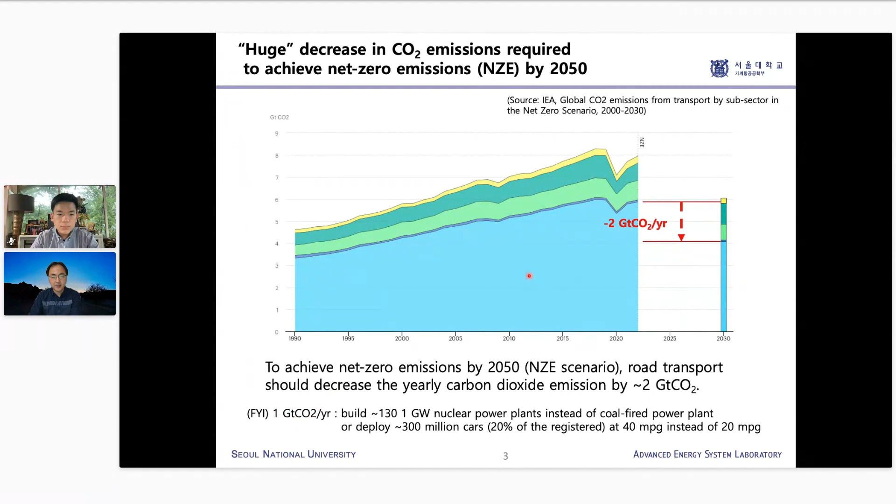In the road transport sector, people are developing new technologies and are interested in new technologies to reduce GHG emissions. These are the types of powertrains and fuels available nowadays.

The very first one is the conventional vehicle, using gasoline or diesel as fuel and the internal combustion engine as the power conversion device. That's the conventional vehicle, or ICEV, internal combustion engine vehicle.

There's also the hybrid electric vehicle. It still uses gasoline and diesel as fuel and still has an engine, but part of it is actually driven by a battery and motor system, which is why it's called a hybrid electric vehicle. But it's still depending on gasoline and diesel as fuel.

Next is the battery electric vehicle, which is a big topic nowadays, using electricity as fuel, and the powertrain is only battery and motor. Lastly is the fuel cell electric vehicle, where hydrogen is used as fuel with a fuel cell as the energy conversion device, converting hydrogen into electricity, and that electricity drives a motor to drive the car. This is also a new technology people are using to reduce GHG emissions.

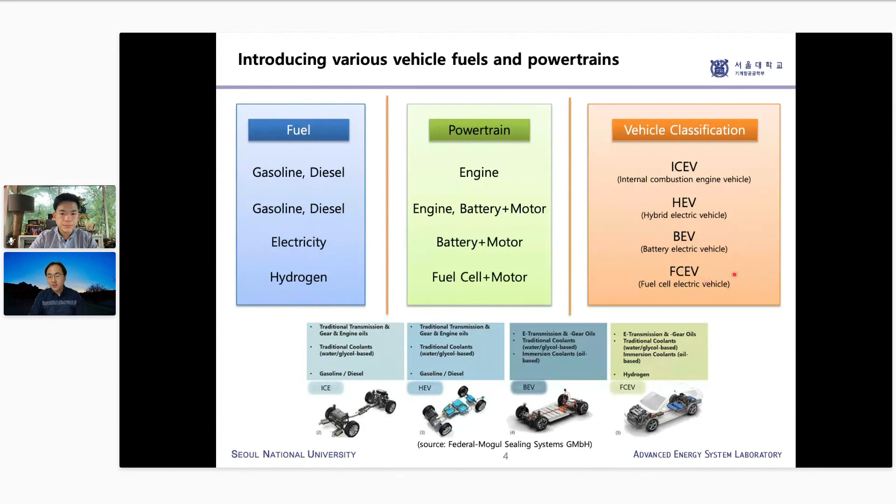People are devising many different ways of reducing GHG emissions. Let me ask this question: by introducing the electric vehicle or hydrogen electric vehicle, people's intention is to reduce carbon emissions out of the vehicles. The first question might be easy to answer: between the gasoline-fueled internal combustion engine vehicle versus the battery electric vehicle, which is cleaner in carbon emission sense?

Well, there's no CO2 or carbon emissions out of the tailpipe of the electric vehicle, so you may say it's cleaner. Now, if comparing battery electric vehicle versus hydrogen fuel cell vehicle, once hydrogen enters the fuel cell and reacts with oxygen from the air, it only produces water, meaning no carbon emissions in the tailpipe. So comparing battery electric vehicle and hydrogen fuel cell electric vehicle, which is better, or are they the same? These questions can be answered from different perspectives, with a wider scope to consider.

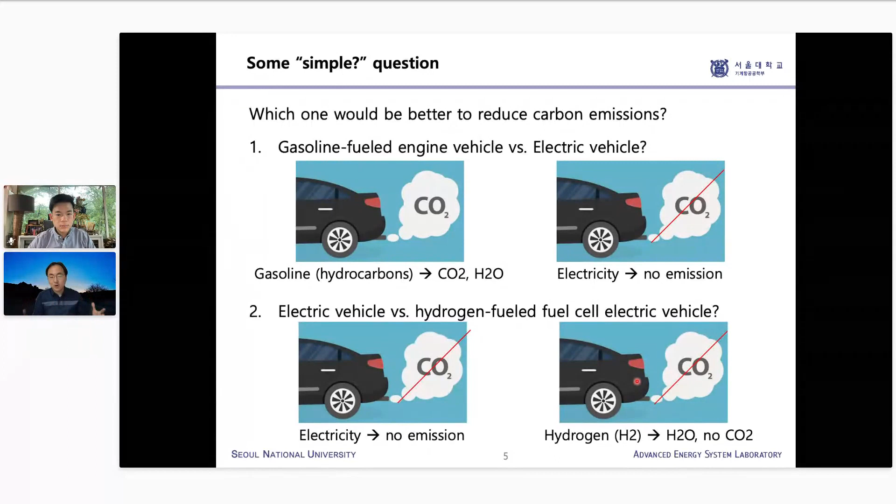That's what's happening in this slide. First, what we've focused on is tailpipe emissions. Again, the internal combustion engine vehicle has carbon emissions from the tailpipe, and the battery electric vehicle has none. That's fine, so we just compare it here.

But the thing is, gasoline isn't just from the air, right? We need to make it—it's made from crude oil and turned into gasoline. The same is true for the electricity used in the electric vehicle. Electricity also has to be made, with power generation associated with it, and the power generator or power plant needs fuel too. So electricity doesn't come from nowhere, it has to be made.

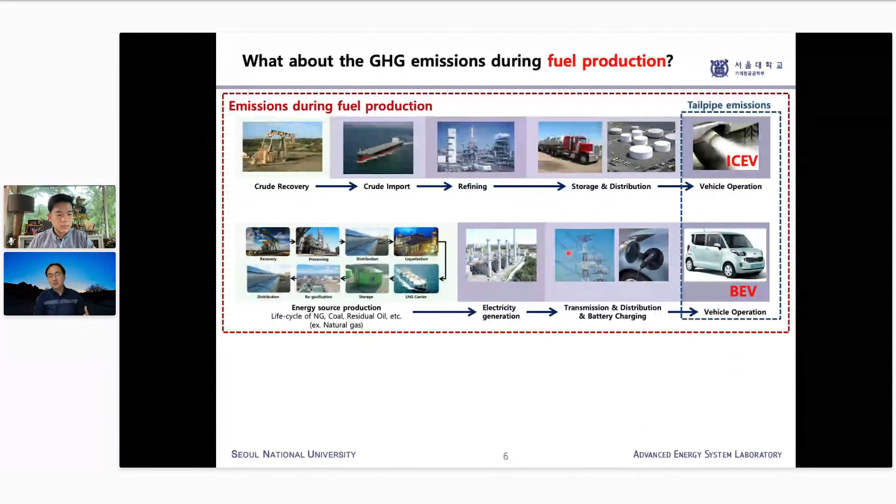So now we can think about which one is better if we include in our study scope all these fuel production processes, and the greenhouse gas emissions associated with them. Now we can ask that. This isn't actually the end of the story—we can increase the scope further.

Because with the internal combustion engine vehicle versus battery electric vehicle, we know the battery electric vehicle has a big battery pack on top of the frame of the car, meaning it's a different car. Having a different powertrain might cause differences in vehicle production—raw materials, parts production, vehicle production—and different vehicles can have different things happening in their life cycle processes, which might change the emissions associated with that.

So this wider scope, or life cycle thinking, is actually what the LCA study is based on.

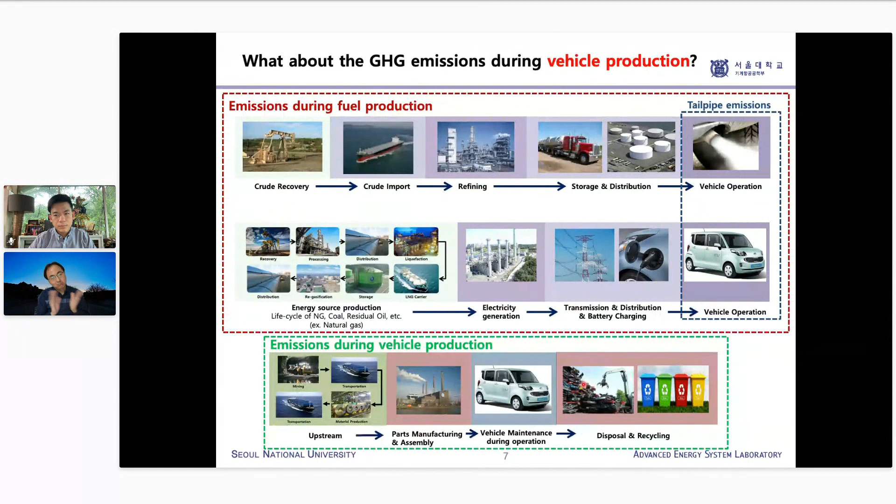LCA answers for such holistic effects from a larger scope of thinking. LCA is nowadays adopted very widely, and is increasingly adopted in many government regulations and rules. So it's getting more and more important, and it's been steeply increasing in importance over the last couple of years.

LCA, from that holistic perspective, is the assessment of environmental impacts. So LCA is about the environmental impact—it's not about the economical, it's about the environmental impacts.

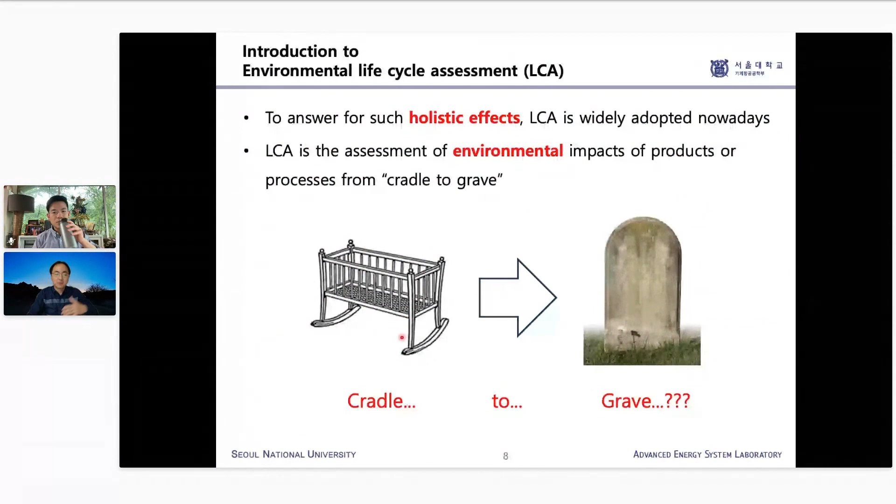Sometimes we call that the cradle to grave scope, or cradle to grave study. The cradle is where we put a baby, lying in it—that's associated with the birth of something. And the grave, that makes sense too—this is the end of something. So cradle to grave basically means from the birth, or the start, to the end. That's what the life cycle is.

To use more technical terms, cradle to grave associates with these main categories. First, raw material extraction is where it starts—you need to get some materials out of the ground, for example, and out of the raw material you're going to make the more useful material.

You also need to manufacture the parts and manufacture the vehicles. In the middle, you need to transport the raw materials and the better material, and also move around the parts and the vehicle.

Once you make the vehicle, you need to transport it to the customer or the dealer shop, for example. There will be some other transportation and distribution associated, and also the use phase—because the product will be used, and during use there are also some consumable things, and all those things are included in the life cycle phase.

Finally, at the end of the material or product's life, there will be disposal, and also some part of it could be recycled. So these are the cradle to grave processes we typically refer to.

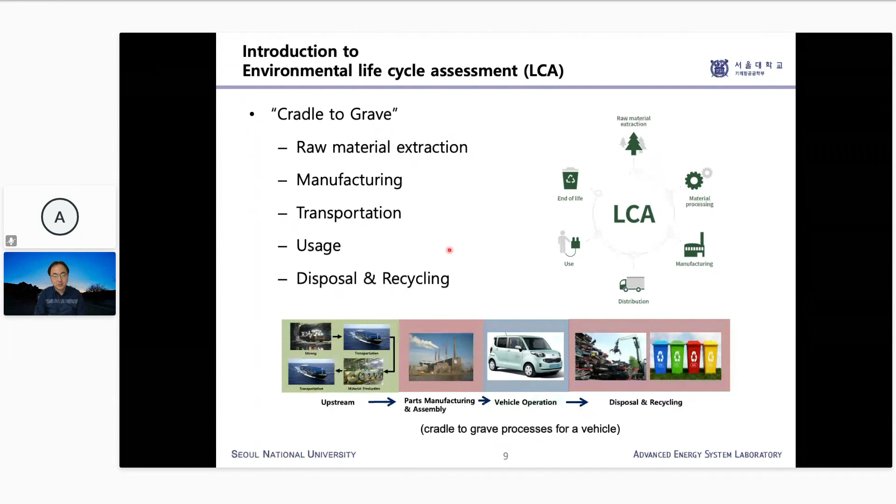Once you have that life cycle ready, associating the parts, materials, processes and services, what you do next is calculate the environmental impacts during those life cycle processes we just described. Throughout all these life cycle processes, you come up with the environmental impacts.

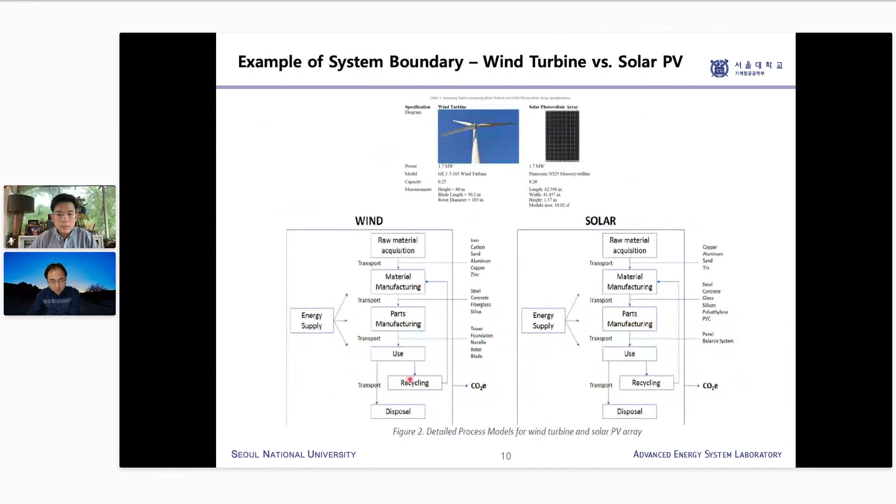Those environmental impacts come from, for example, greenhouse gases or particulate emissions, and during these processes water can be used, so there are water uses. Also, if there are toxic chemicals from any of these processes, there could be toxic materials involved. And if there's any land use change during these processes—like cutting down trees to make way for plants—that creates land use change, and so on and so forth.

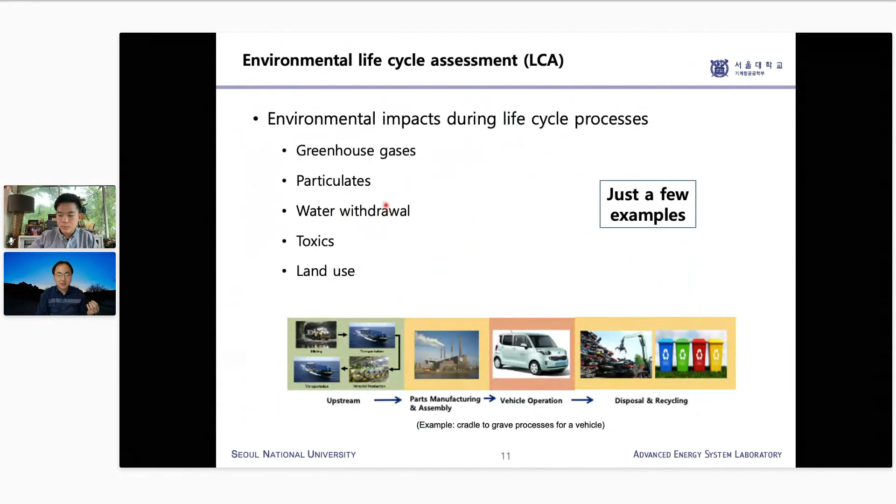So these are just kind of small examples, and then to give you more of the bigger picture, this is actually what that is. So from those life cycle processes, you can talk about all these different materials and emissions and pollutants, or the small elementary flows, and all these things are coming out of the processes, and we call that an inventory.

And then out of those individual elementary flows, you're going to combine them together to come up with the impact category. For example, currently people are mostly considering climate change or the greenhouse gas effect. So out of these many different elementary flows, you're getting the greenhouse gas species only, then using the global warming potential value to get the CO2 equivalent mass in the end, and that gives us the overall climate change effect.

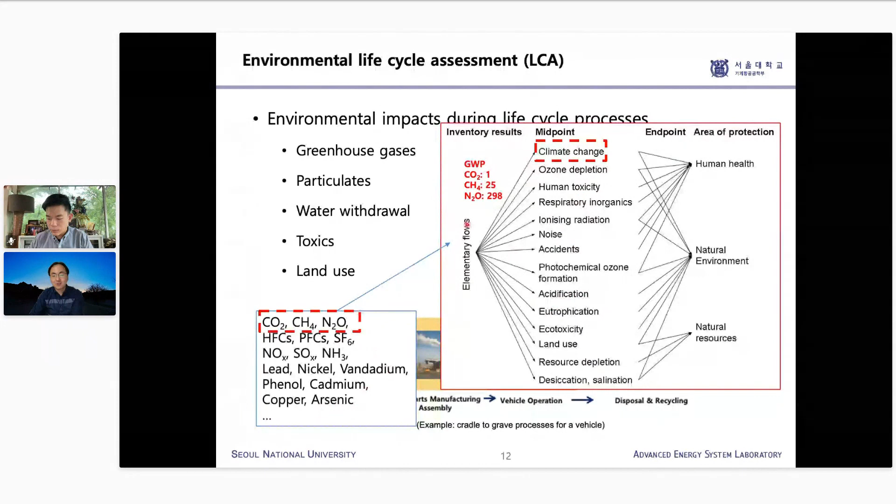I know nowadays climate change is the main focus of LCA studies, but that's not actually the end of the study, because LCA considers all the different impact categories we can think of: ozone depletion, human toxicity, even noise, and acidification. So many different impact categories out of different elementary flows. But nowadays people are mostly interested in the climate change impact category.

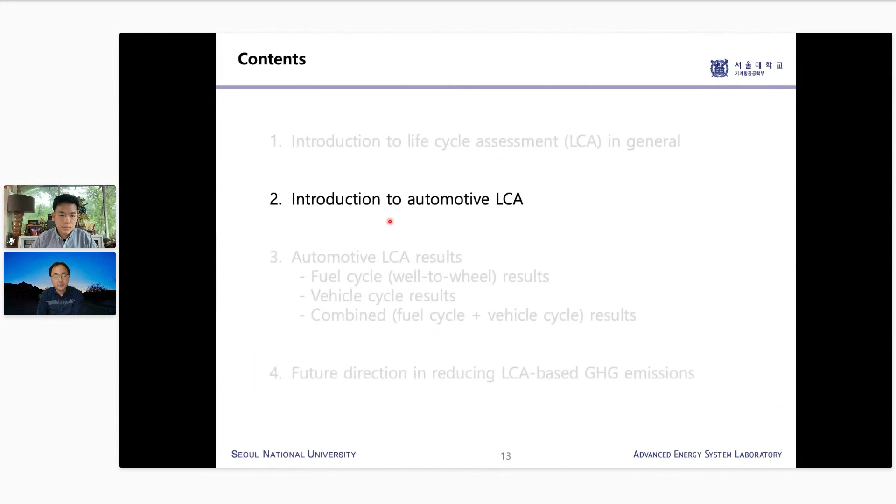So that's the general introduction to LCA, what it is, what it covers, and how it's done. Let's move on to the second topic, which is more specific: LCA on the automobile, which we call automotive LCA. At this point you might think, okay, we are talking about the life cycle, and that's too much of a scope. What is the life cycle, and what's associated? Where is the boundary? Do we really consider everything around it?

So that's the thing. In the ISO standard of LCA, the first thing users should do is set the objective of their LCA study, and then set the system boundary or scope of the LCA study to achieve that objective. So when you perform LCA, we need to set a certain scope or system boundary to start with. So this is what it is.

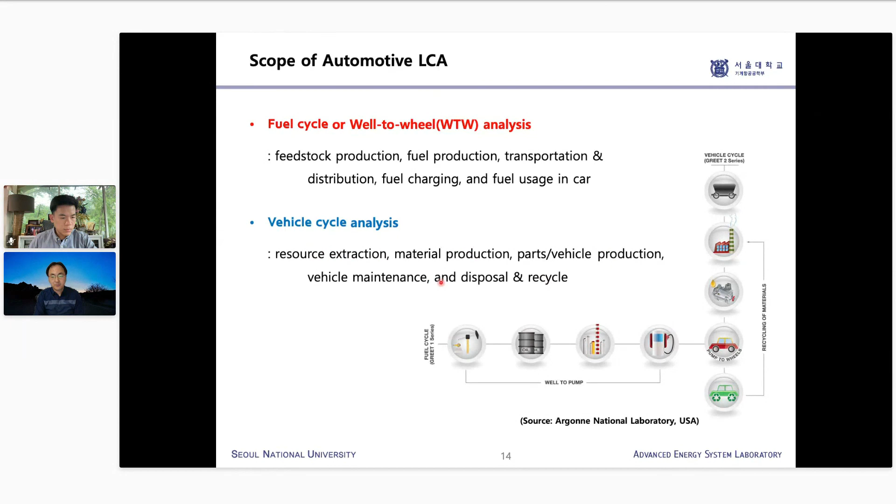So, what have we done so far in our research group? We adopted the GREET program, an Excel-based program, as the framework of our LCA calculation. GREET is originally from the US Argonne National Laboratory, and we are using that framework, but we need to change all the major data inside it, because the Korean situation is different from the US situation. So into that framework we put Korean-specific data. That took time, and it's still taking time now.

And then since 2011, we started this work, and we are referencing the domestic data and foreign data, and also we are partnering with all these associations and the vehicle OEMs to get better data. So typically, as a joke, when we talk about LCA, we call it this way: garbage in, garbage out. Meaning that if you put bad data into it, the result out of it is not any good. So the data is actually the key to this LCA analysis, and there are lots of data needed, as you can imagine, because we are talking about the life cycle.

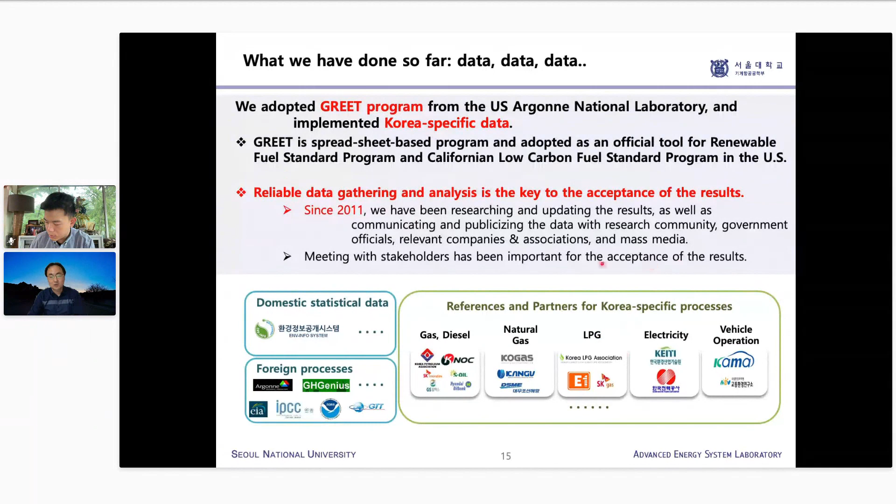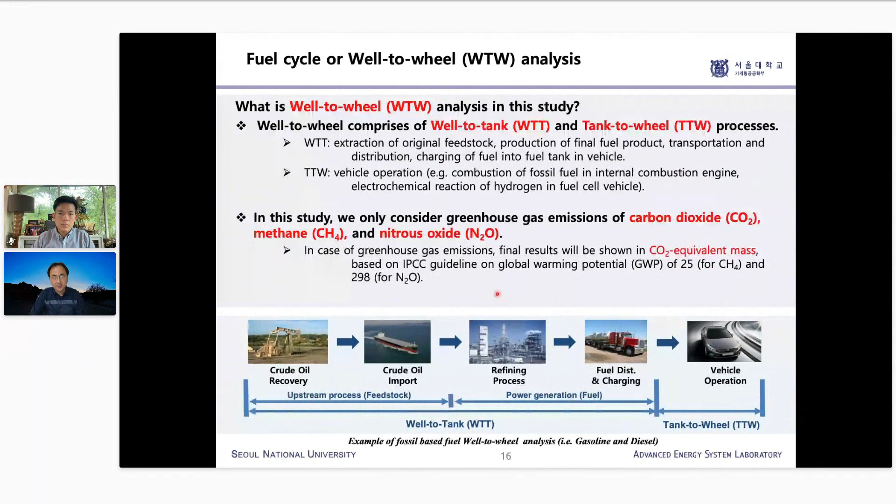And then talking about the vehicle cycle, now you have a sense of what the vehicle cycle is. It's about vehicle production. But one thing I need to point out: this is not just making the vehicle, it's also use of the vehicle. During the use of the vehicle, certain maintenance materials are used for your vehicle operation. For example, you need to change the tires and the engine oil during the lifetime. Those tires are made from something, so there's a life cycle associated with your tires and with your engine oils, and those are also included. And then there's recycling once the car is at the end of its useful life. And the same greenhouse gas species are considered.

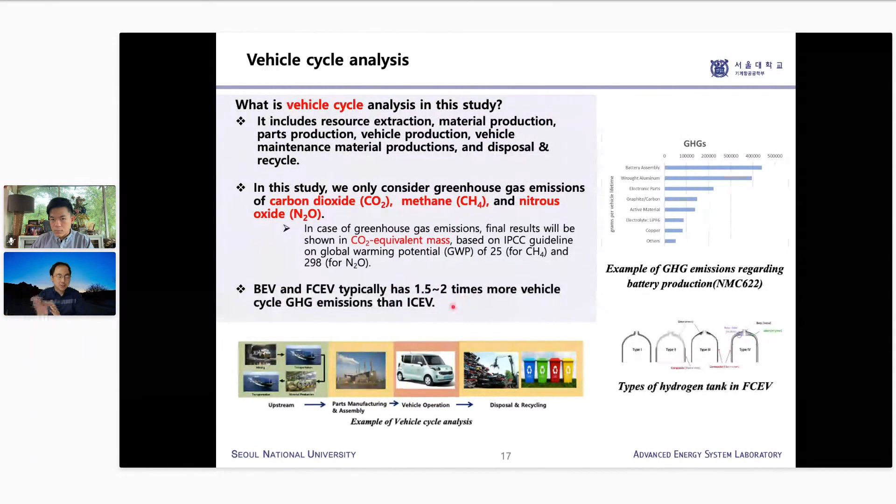To give you some sense, and we're going to see the quantitative numbers later on, our original motivation for the vehicle cycle is: how different are the battery electric vehicle and fuel cell electric vehicle compared to the internal combustion engine vehicle in vehicle cycle emissions? Let me tell you, as a rule of thumb, the battery electric vehicle and fuel cell electric vehicle in the same vehicle class emit 1.5 times or 2 times the greenhouse gas emissions during the vehicle cycle only. But we're going to see the quantitative numbers in the following slide.

Okay, so this is about the vehicle cycle analysis, and then the scope of fuels and powertrains we've covered in this study. From the fuels perspective, we consider gasoline, diesel, LPG, and also natural gas. But in today's presentation, we're going to only focus on gasoline and diesel. And also for the electric vehicle, we have electricity as a fuel, and hydrogen as a fuel for the fuel cell electric vehicle.

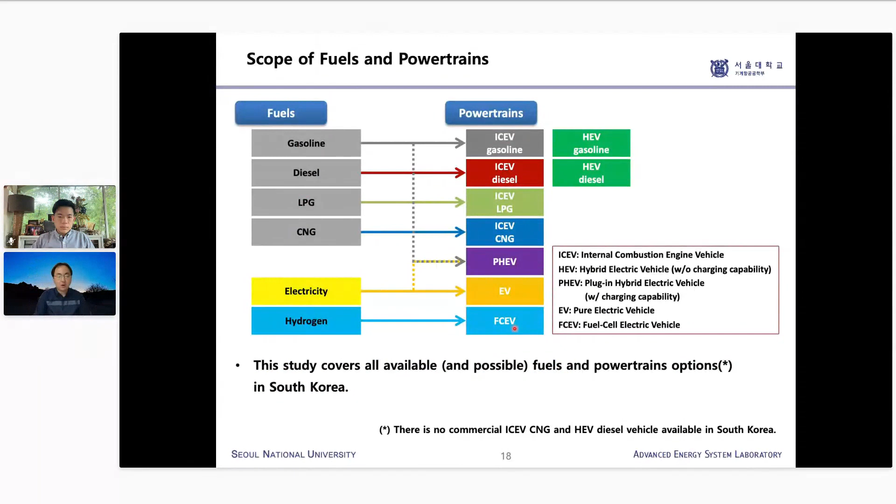From the powertrain perspective, we consider the internal combustion engine vehicle, ICEV, the hybrid electric vehicle, HEV, and also EV and FCEV. Those will be covered in the results section. We've actually done the whole thing in our study, but we will focus on some part of it.

Okay, so finally, let me move on to the results section. This results section consists of three subsections. Firstly, we're going to start with the fuel cycle results, meaning we focus on the fuel cycle or well-to-wheel processes only. Then we switch gear into the vehicle cycle results, so only the vehicle production. And finally, we combine these two results together to come up with the holistic or whole scope result. So we're going to go one by one.

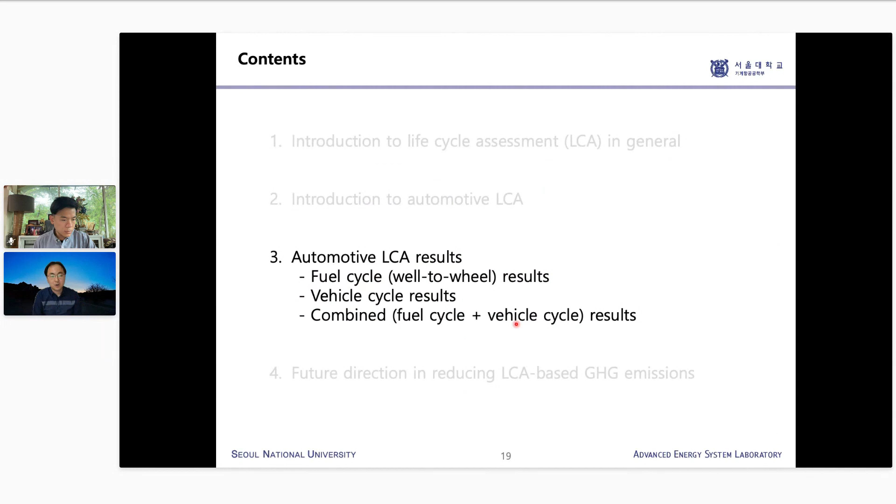So let's start with the well-to-wheel or fuel cycle result. This slide introduces how to read the results; it's just an example, and the real results follow. The well-to-wheel GHG emissions will be shown in grams CO2 equivalent per kilometer. What that unit means is, if you drive the car 1 kilometer, this many grams CO2 equivalent of emissions happen during the whole fuel cycle or well-to-wheel processes.

If you see the left figure, an example of the gasoline-fueled internal combustion engine vehicle, the plot shows about 210 or 220 grams CO2 equivalent per kilometer. So if you drive 1 kilometer, that's how much fuel cycle emissions there are. In this plot, the gray section is the vehicle operation, the big chunk of the fuel cycle. That's the tank-to-wheel emissions, so the tailpipe emissions.

So we've done all this work to come up with the fuel cycle emissions for this internal combustion engine vehicle, crude oil extraction, refining, and all those things. But in the end, the fuel cycle emissions are dominated by the tank-to-wheel process, or tailpipe emissions. That's the typical characteristic of the internal combustion engine vehicle. We still have emissions from the well-to-tank processes, making the fuel, which include crude oil extraction, refining, and everything.

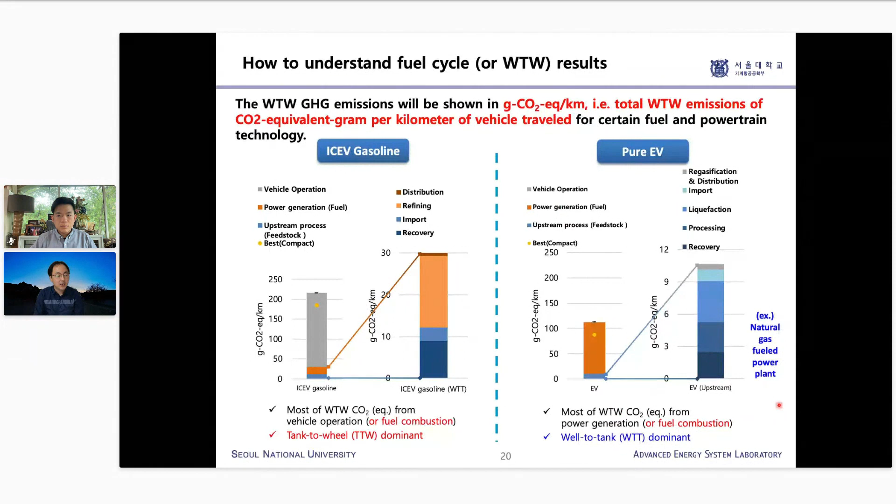So, for the EV case, there's definitely no tank-to-wheel emissions. This is just well-to-tank emission dominant, or well-to-tank emissions only. Okay, this is how you see the result, and then let's see the real result.

This well-to-wheel GHG result is from all passenger vehicle sales in 2019 in Korea. So we just have this passenger vehicle sales data, and then we do the weighted average by sales volume of all those models considered.

Then we categorize it into the internal combustion engine vehicle fueled by gasoline, diesel, and also the hybrid electric vehicle fueled by gasoline. There's no diesel hybrid electric vehicle in Korea. And then the battery electric vehicle and fuel cell electric vehicle. Why there are three of them, I'm going to come back to that later.

So let's just compare the average value. You see that gasoline internal combustion engine, diesel internal combustion engine, and hybrid can decrease the fuel cycle emissions hugely. And it still has higher emissions than the battery electric vehicle.

So you should see this kind of plot down here. This yellow dot is actually the compact vehicle, and it's saying 'best.' What that means is we are talking about the fuel cycle emissions associated with the compact size vehicle with the best fuel economy - so the best efficient compact size vehicle.

So if you just pick that out, this yellow tells you that. Meaning this yellow tells you what you can do best, having the fuel and powertrain combination in that analysis. That's what it is.

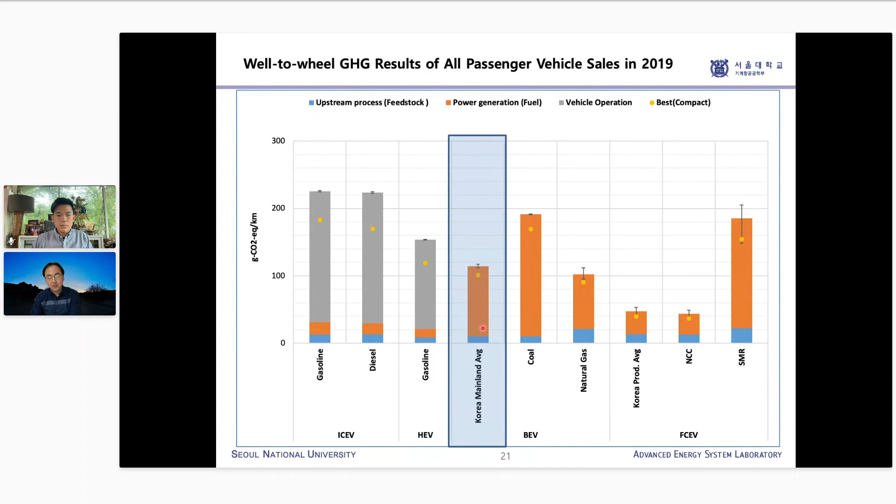This is the Korea mainland average result. What it is, we are considering the power generation mix to come up with the number. Using statistics in Korea, we know every power plant in Korea, every power generation amount throughout a certain year, and also every fuel used in that specific power plant throughout the year. So we can come up with the efficiency and emissions out of that plant.

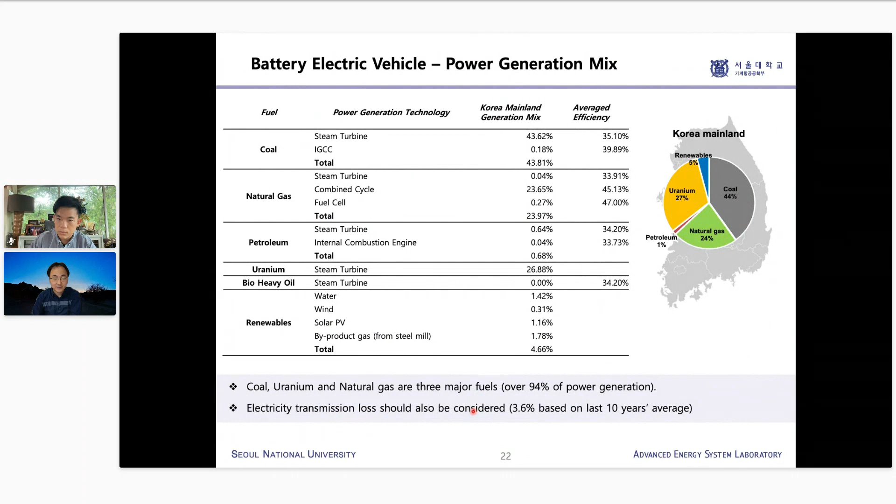That's how we come up with this generation mix, which mainly consists of coal-fired power plant, natural gas-fired power plant, and nuclear power plant. We use that mix of power generation to come up with the number for the electric vehicle. We also consider electricity transmission loss, because from the power plant to the charging station there will be transmission loss, which should be considered in the life cycle of that electric vehicle.

And then the other two on the right side - this is still the battery electric vehicle, but we're showing you some numbers. This is coal. It's saying coal - what that means is, if you are using electricity from only the coal-fired power plant, what will be the fuel cycle emissions? That's huge, as you can see.

And if you see the best compact number, that's just compatible to diesel or gasoline, right? So that means coal-fired power plant having larger emissions doesn't help the battery electric vehicle. If you're talking about the natural gas-fired power plant, that's very compatible to the mix, and also very good numbers there. The natural gas-fired power plant has higher efficiency, and natural gas itself has lower carbon content in it.

Okay, so that's just more than enough about the battery electric vehicle. Let me move on to the fuel cell electric vehicle. If you see the first one, this again is some kind of Korea average. That was done in a similar way - I'm going to show that in the next slide. Anyway, this is a very small number as compared to the others, right?

Let's see how we come up with the number first, and then we're gonna come back to this slide to talk about the other two.

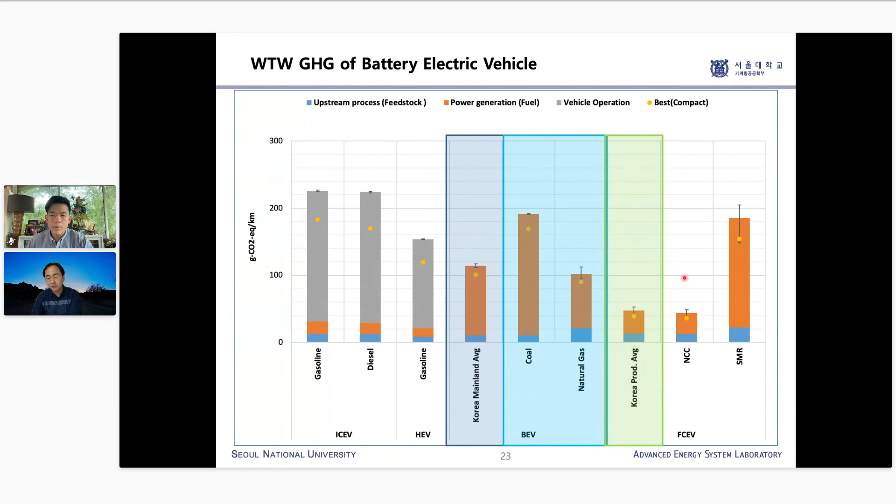You know that hydrogen is not really from just digging the ground, right? Hydrogen is actually a secondary fuel, meaning you need to make it from other fuels, primary fuels. It should be produced, and there are many different ways to produce hydrogen.

So what we've done in our study is look at the hydrogen gas stations throughout the country, and we know how much daily filling capacity they're running on per station, and we also know where they're getting the hydrogen from. So certain hydrogen gas stations use hydrogen from naphtha cracking or the petrochemical industry as a byproduct, some use SMR-based hydrogen, and some use electrolytic hydrogen. We have these different stations using different hydrogen sources in different amounts, so we can finally come up with some kind of share.

It comes out that 95% of the hydrogen used as hydrogen fuel cell vehicle fuel comes from the petrochemical industry or naphtha cracking as a byproduct, and some part of it is SMR or electrolytic hydrogen. Using that, we do the life cycle analysis of that hydrogen production process, and that will be part of the calculation.

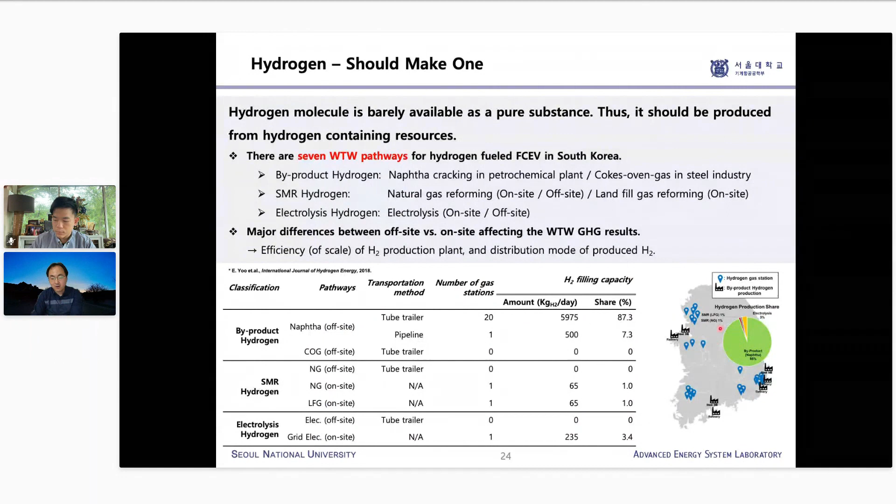The other important thing about hydrogen is distribution and storage in its life cycle. As you all know, hydrogen is one of the lightest kinds of molecules, and in the ambient state, the volumetric energy density is very, very low. So what that means is, to move it around and distribute it—you make the hydrogen in a certain plant and then need to move it to the charging station, you need to distribute it.

To do that, they typically compress the hydrogen, using 200 bar compressed hydrogen in the tube trailer. A tube trailer is like the tanker of hydrogen—basically the hydrogen tanker. That pressure is really high.

But even with that, in Korea, there's a huge hydrogen tube trailer, but it only carries about 300 kilograms per truckload. To compare with gasoline, the biggest gasoline tanker can deliver 25 tons per truck. So you see a difference of orders of magnitude per truckload. Even when you consider that hydrogen has a higher heating value, to deliver the same amount of energy you need 30 times as many truck trips because of the lower energy density.

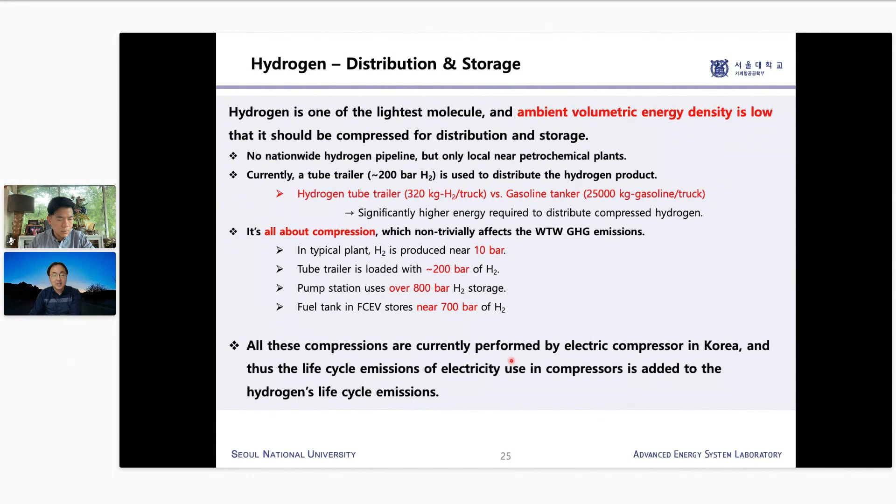And there are life cycle emissions associated with that electricity use in the hydrogen's life cycle—it takes energy, and that takes emissions associated with it. Okay, so that's what that is.

So this is the Korea average for the fuel cell electric vehicle—hydrogen produced mostly from the petrochemical industry. The other two: NCC is the naphtha cracking center, which is the petrochemical industry byproduct hydrogen—a very small number, since this accounts for 95%.

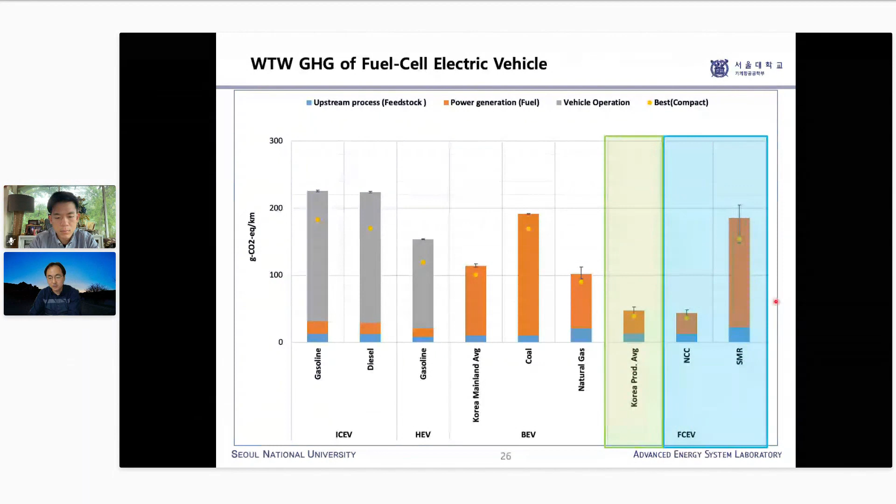Finally, on the rightmost is SMR, or steam methane reforming process—from natural gas to hydrogen, what we call gray hydrogen nowadays. If you're using gray hydrogen, look at the number—it doesn't make sense at all. Even if it's a fuel cell hydrogen electric vehicle, if you're using gray hydrogen as fuel, there's no way it makes sense to use the fuel cell electric vehicle to reduce GHG emissions.

So this is actually enough about the fuel cycle, let me move on to vehicle cycle. Vehicle cycle is much more complicated than fuel cycle, but I'll be brief since there's too much going on. When we talk about vehicle cycle emissions, as a rule of thumb, the amount of materials used will be the key factor. So a larger vehicle using more materials will have more vehicle cycle emissions. That makes sense, no doubt.

Now let's focus on the difference between internal combustion engine vehicle and battery electric vehicle, and internal combustion engine vehicle and fuel cell electric vehicle. What's different with these different powertrains? What will be the key difference from these new vehicles?

Let's talk about the battery electric vehicle first. You can imagine that the key difference is the battery - that's the big thing compared to internal combustion vehicles. In contemporary battery electric vehicles, 20 to 30% of the whole vehicle's weight is actually the battery pack. That's a huge number.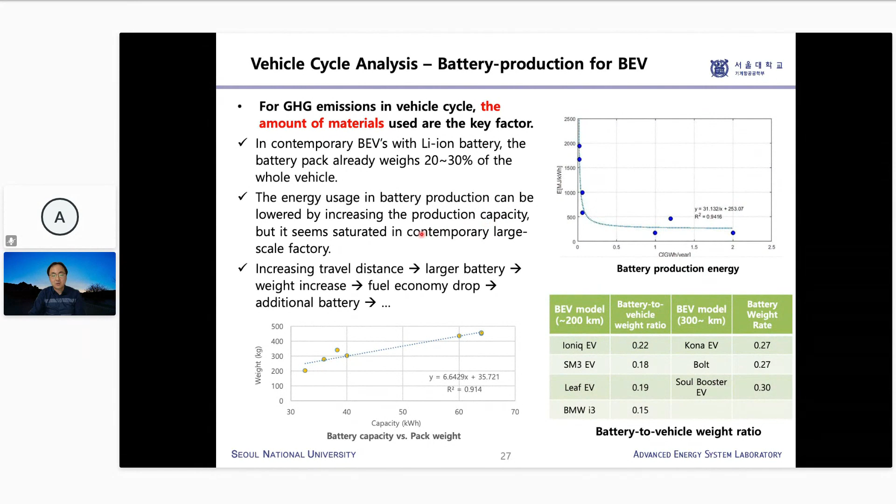That makes huge life cycle emissions associated with the battery electric vehicle. That's one big thing about this battery electric vehicle.

For the fuel cell electric vehicle, you may think, okay, that's the fuel cell, right? No, actually the fuel cell contributes additional emissions, but it's more from the hydrogen fuel tank, the high pressure hydrogen fuel tank. Typically the mainstream nowadays is a Type 4 tank, and this is the composition of it - it uses a lot of CFRP, which consists mostly of carbon fiber and epoxy.

This carbon fiber is made through very high temperature processes, which takes a huge amount of energy. So producing the hydrogen fuel tank takes a lot of energy - that makes a huge difference.

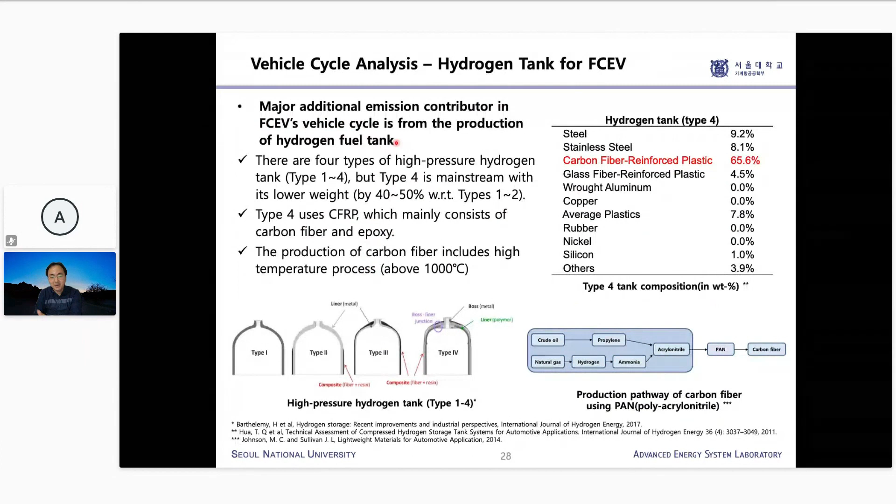So just kind of being simple here, but there are too many things around the vehicle cycle. To give you some kind of big intuitive way of understanding it, that's how I'm focusing on it. Now let's see the result.

This is the vehicle cycle GHG results only, about the vehicle cycle. Again, same kind of group of vehicle sales in 2019, with 4 different groups: small sedan, large sedan, small SUV, and large SUV, because different classes of vehicle use different amounts of materials, and different amounts of material mean different emissions in vehicle life cycle.

There are all similar studies. Let's focus on the small sedan group only, and you can see the others in your own time. For the small sedan, let's see - this is the internal combustion engine gasoline vehicle, then diesel vehicle, hybrid electric vehicle, battery electric vehicle. This is the 200 kilometer range it can cover, and this is the 400 kilometer range it can cover, and finally, fuel cell electric vehicle.

Let's see the blue here - blue represents components. You see that because they're all small sedans, they use a similar amount of components, so there's slight change up and down, but they are more or less the same.

But the fuel cell electric vehicle has a large amount of component emissions, and that difference is coming mostly from the hydrogen tank I just mentioned. So that's a big additional emission associated with it.

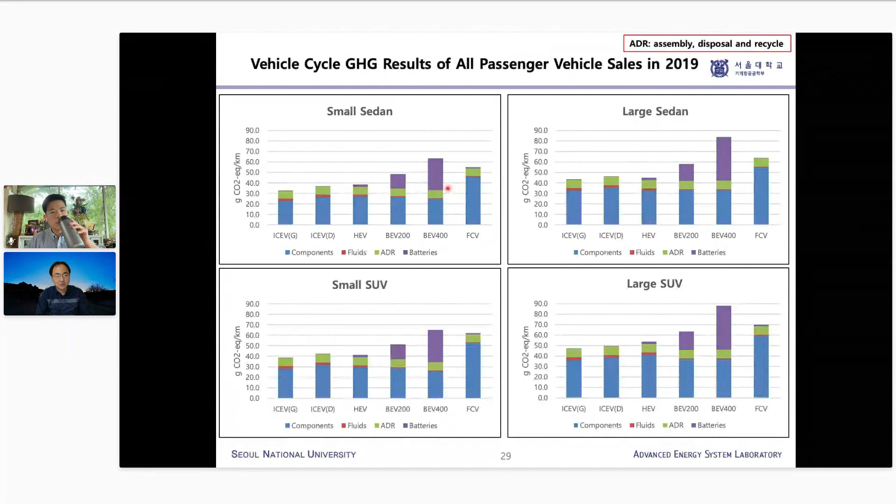Finally, let's combine this fuel cycle and vehicle cycle result together. On the left we have a specific vehicle—not the average, but a specific vehicle most sold in Korea at the time of the study. The left five are about the compact size vehicle: gasoline, diesel, hybrid electric vehicle, battery electric vehicle with a shorter range of 240 kilometers, and a longer range of 360 kilometers.

Overall the trend remains the same: gasoline, diesel better, hybrid much better. Now comparing the battery electric vehicle with the hybrid electric vehicle, by adding this yellow, which is the vehicle cycle emissions, on top of the well-to-wheel fuel cycle emissions, they are more or less the same. For the larger distance one, it's actually slightly higher emissions in the end. So at this moment, hybrid electric vehicle is very comparable with the battery electric vehicle from a life cycle emissions perspective.

If you go to the right, which is the SUV class, again gasoline, diesel, hybrid—we have the same trend. But now see the battery electric vehicle here, this is a Tesla Model X, and it has very large emissions. Most of the emissions come from this orange, which is power generation, because this is a big vehicle—an SUV is already heavy, and then you just put the big battery pack on top of it, making it much heavier, so it will have very bad fuel economy.

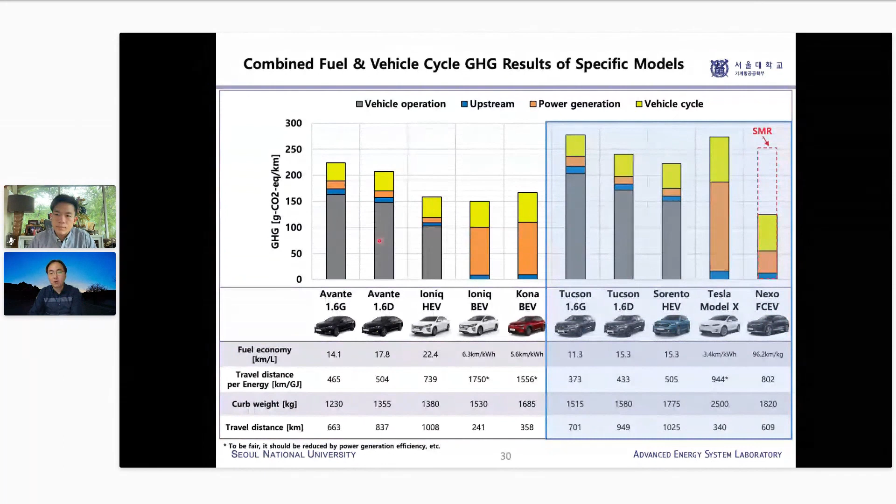Finally, the rightmost is the fuel cell electric vehicle. If you're using byproduct hydrogen, it still looks okay—good, actually, I should say. But if you're using gray hydrogen, that's not good anymore. So it's the same story, but just more specific about the specific vehicle we're talking about.

Okay, so finally, the last chapter of my presentation: the future direction. We've now seen LCA-based GHG emissions and their characteristics, so I think you already know the answer to what we should do, but let's be more specific and quantitative here. It will be a kind of short section.

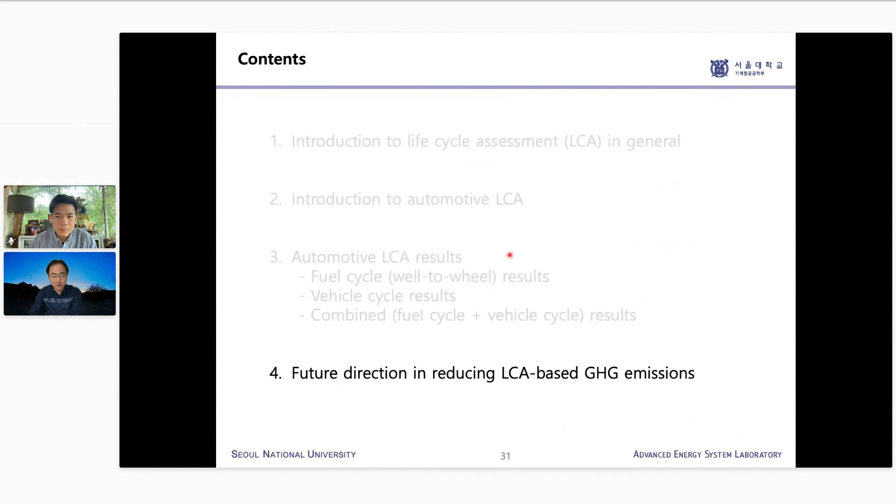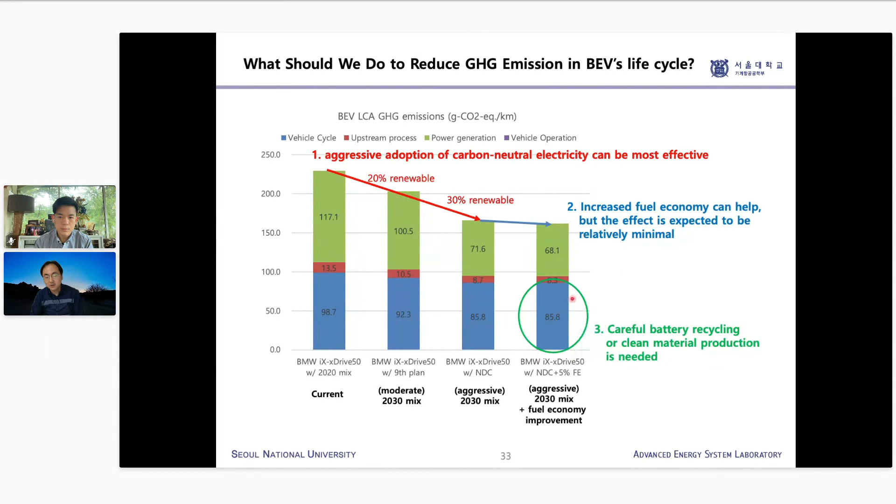If you talk about the hybrid electric vehicle, let's apply that grid electricity there. You see that even with 30% renewable, there's not much decrease, because in the end, the hybrid electric vehicle doesn't depend much on grid electricity. It depends on its own.

Its own efficiency, meaning its own engine's efficiency and system's efficiency. So to confirm that, we increase the fuel economy of that vehicle by 15%. Again, this is the number achievable by vehicle OEM confirmation. So with a 15% improvement, you see that there's a huge decrease in the greenhouse gas emissions, life cycle emissions there.

And then finally, the last one is the e-fuels use. So what I mean by e-fuel, this is a synthetic fuel coming out of green hydrogen. You see the hydrogen from renewable sources, the green hydrogen, and then the carbon from the air. So you're doing direct air capture, DAC. And then using the hydrogen and CO2 out of air, you synthesize the hydrocarbon fuels, basically. You synthesize gasoline or diesel. So that's why it's synthetic fuel or e-fuel.

And if you're using the e-fuel, because it's from carbon-neutral sources, it has zero life cycle emissions or small life cycle emissions. And if you include that in the fossil gasoline, here in this case we are only mixing 10% of e-fuel into 90% of fossil gasoline. Even with that 10% mix, that can significantly decrease the life cycle emissions. If you increase the share of e-fuels used, then you see what will happen to that decrease in the GHG emissions.

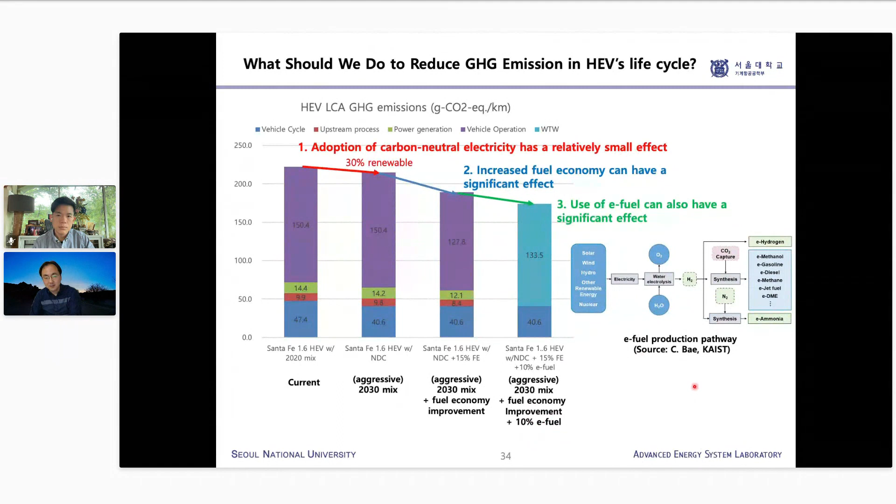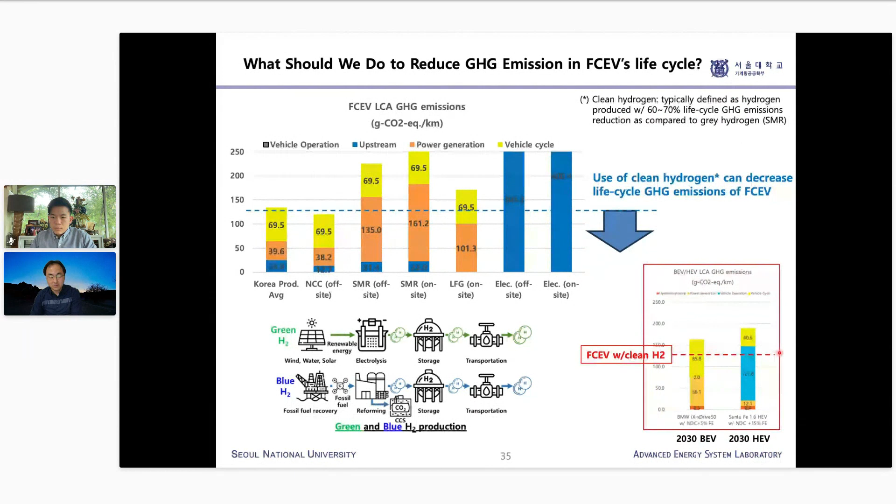The blue dotted line shows the life cycle emissions of the fuel cell electric vehicle if you're using clean hydrogen. So that is kind of a threshold, and below. If you make it green hydrogen, it will be zero, right? Well, associated with the hydrogen production itself. And compared with the future battery electric vehicle and future hybrid electric vehicle, if you're using clean hydrogen for your fuel cell electric vehicle, that is very competitive from the automotive LCA perspective. So this is actually the end of my presentation.

Again, to emphasize: to understand the holistic effect of a new technology, LCA is increasingly adopted nowadays, even in government rules and regulations. So it's getting more and more important. From the LCA point of view, it's not just, okay, use the electric vehicle, use the fuel cell electric vehicle. That's not the end of it. You need to see the holistic effect of it.

From the LCA point of view, even the hybrid electric vehicle with the internal combustion engine has the possibility to reduce GHG emissions. And the battery electric vehicle and fuel cell electric vehicle have different perspectives and different strategies to reduce GHG emissions to achieve carbon neutrality in the end. And all the rest is actually repeating what I've just mentioned so far.

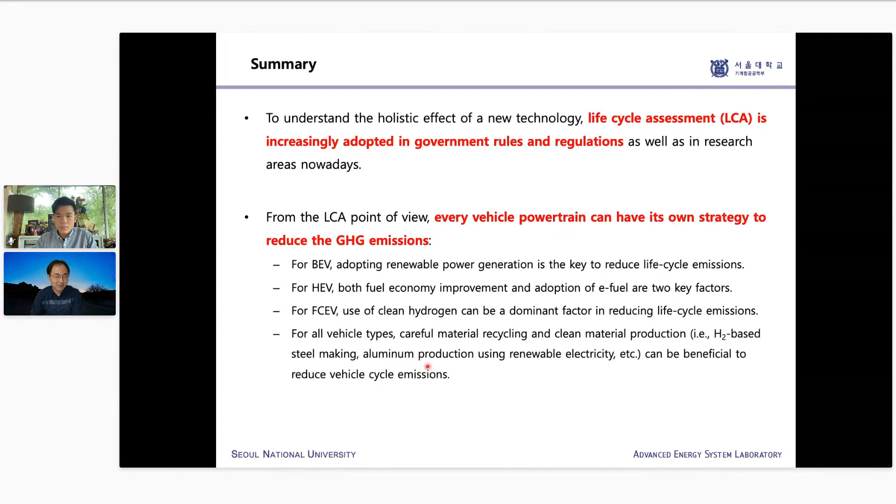Thank you very much, Professor Song. It's really exciting to hear, and also very shocking to see that, what I believe so far, that I'm using an electric car, and when I see the result of the life cycle assessment, I start to doubt whether I am helping the world or not. Okay, but yes, you mentioned.

Let me start with some questions about the holistic picture of this LCA movement. So you mentioned that LCA is about environmental, not about economic. But I feel like many countries now put economic incentives for people to do LCA. Does that affect your work? For example, who sponsors you to do the LCA, and you have to adjust parameters. How do you keep your integrity when doing LCA when economics is involved?

Yeah. So typically, many of the good LCA studies are actually alongside TEA, techno-economic analysis, which is basically the life cycle cost analysis. So they're actually going together in many studies. And also, as you point out, from the government point of view, both aspects are really important. They need to see the environmental impacts and also the cost effect.

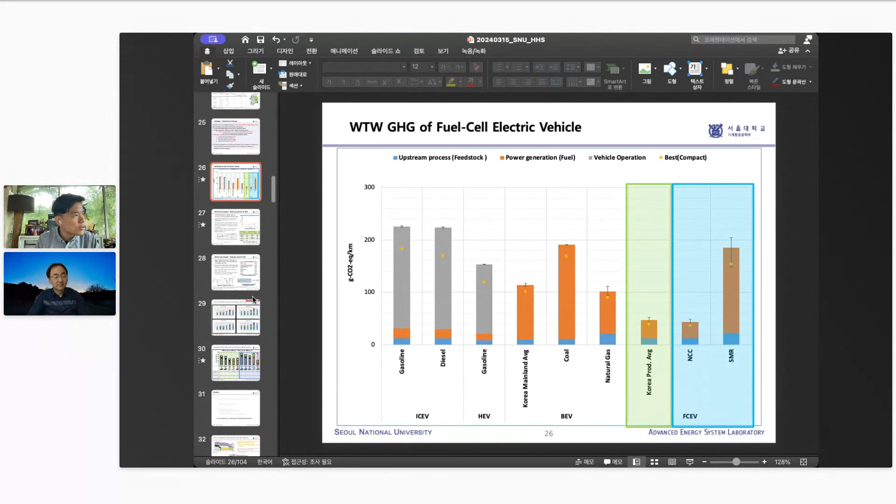And I have another question. It's quite shocking to me, because you said the battery electric vehicle and the fuel cell one produce 1.5 times more greenhouse gases per kilometer compared to the ICE one. My first thought would be, the hydrogen fuel cell uses a much smaller battery. But then you mentioned that most of the carbon emission from manufacturing comes from the tank, right? So why is the tank releasing so much carbon dioxide when made?

It's just quite surprising, because I would imagine extracting all these elements to make a battery would produce more carbon emission than making a tank for hydrogen. Can you elaborate more? Yeah, that's actually a very important and very good question. I just skimmed through it, so I didn't make myself clear enough.

So this is the additional one, right? You still need the same frames, seats, tires and so on. But when you make this high pressure hydrogen tank, hydrogen is a small molecule, and it tends to penetrate through materials and make them brittle. Then think about the high pressure, like 700 bar, which makes it even more so. That's why the hydrogen fuel tank is special, not like the gasoline tank.

So it's made largely out of CFRP. That means in the vehicle life cycle, there is CFRP made in some part of it. Making CFRP takes a lot of energy because it's made mostly of carbon fiber, and carbon fiber is not easily made. That takes the energy. So that's what it is.

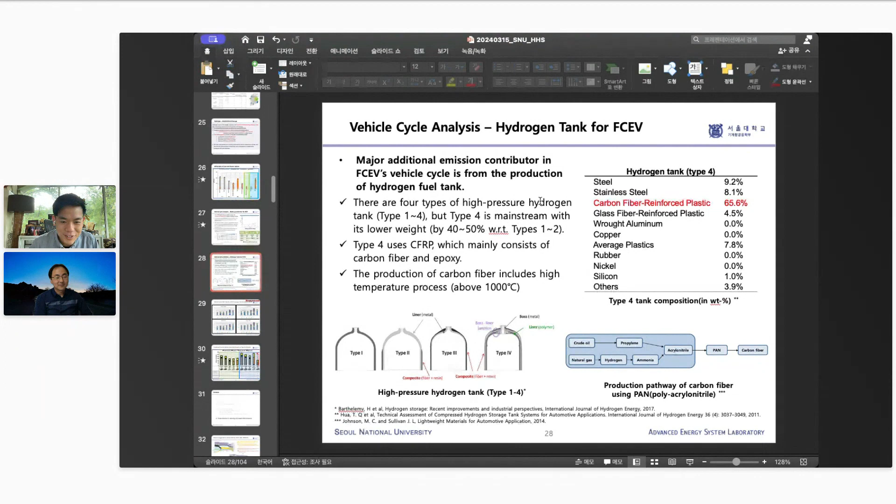Got it. Can you go to the energy flow slide, please? The global energy flow. Yeah, so my research is on hydrogen.

Do you agree with this, or do you have any opinions? You know what, actually I can. It's not easy to say how it'll be done in the future. This is too big a study for me to argue against.